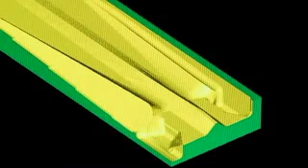Digital design in the context of building is the end of the process of 19th century industrialization. There's a lot of hype that has confused the issue to a certain extent. The ability to make wacky shapes, we've always had that ability. The real thrill is digital technologies make what we already made better, faster, cheaper.

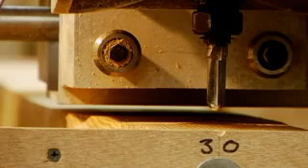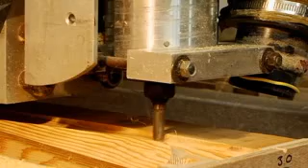Getting tools to run via digital information, first starting with paper tapes with holes in them, sort of like a piano roll, and then fairly quickly through computers. It's a very natural progression. Things like laser cutters, milling machines, routers. The basic platform for that machine, X, Y, Z axis, is identical to machines that were built and developed in the late 18th century. Those machines were not developed for people.

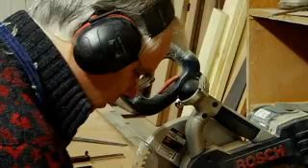A person can control two axes of movement, right? Like an Etch-a-Sketch. Pretty well. But the tool can go in any dimension it wants. Is this happy going in a straight line? Is this going in a curve? Is it going in a curve in 3 dimensions? And a robot, of course, can move all over the place. It has 5 or 6 axes of movement.

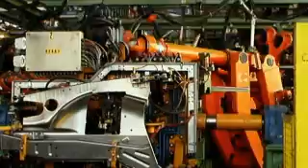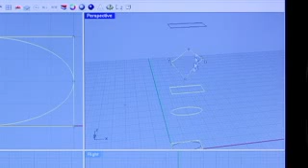For designers, the exciting thing was when that machine code, the G codes and M codes and so on that actually run the machine tools, were able to be combined with the programs that allow you to see what it is you're making. So the drawing and the machining came together into CAD/CAM programs. When you have a 3D model that can be rotated, you can take sections at any point, and they can actually be used to run machines, your ability to make complex shapes is obviously greatly eased. Now you can operate the tool over a fixed piece of work instead of putting your work through a fixed piece of machinery.

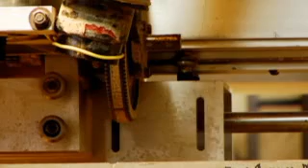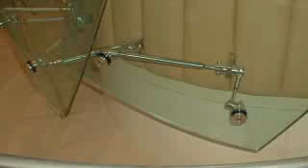The beginning of our involvement in buildings was Pei's pyramid at the Louvre. We came up with the fittings. Pei understood that as the structure becomes less and less, you go from this big steel beam to smaller and smaller tension rods, the level of detail in what's left becomes more and more important. The parts look simple, but they're becoming Swiss watches. Take the Condé Nast cafeteria where you have these organically shaped 16-foot long pieces of glass. The fittings that hold that glass up have multiple parts in them that are moving.

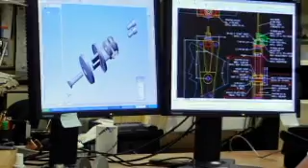People have been doing precision things for years. If you were making ball bearings in the 40s, a crude ball bearing that's 1/8 of an inch in diameter has a tolerance of maybe plus or minus 1/2 thousandth of an inch. That's a crude one. But it would take you a day to set up a machine to actually get the precision. You leap forward to today, we'll make a very sophisticated computer solid model, send it to the milling machine in our own shop, and make a physical model in a couple of hours. I can run 5 models a day.

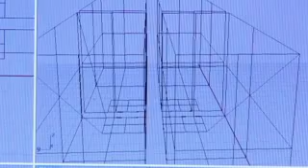To be able to test a piece digitally and then physically with a different tool offset or a different tolerance, that's terribly liberating. So if I'm designing a column and I need a dozen of them, I can spend a dozen columns worth of time on that one, and the rest are automatic. It doesn't make it any easier. I don't spend any less time overall, but my time is better spent, and I can make much more complex and satisfying things. Fundamentally, you're dealing with real materials and not virtual materials. You can't have the building fall down.

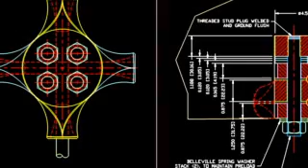So really one of the beauties of digital technology is that I can get closer to the casting vendor who's making one of these parts. Casting is literally a black art. It's just like in the times of Dickens, you got this great dark room and at the end is this orange glow. Now he has very complicated thermodynamic models that say, I need to increase the volume of this thing by 1% because it's going to shrink. So his piece of software increases the volume and then sends it to his milling machine. So from our standpoint, that's a fantastic thing. We know absolutely that he is analyzing the same form that we're analyzing. On a practical basis now, you can marry his technology with your desires.

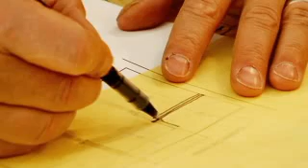We're still sort of in the first generation of students who go through school knowing these are possibilities. But I don't think that you'll see fundamental changes in the shapes of buildings much beyond what we've already experienced, simply because the construction industry is based on thousands of years of taking trees, metal, and even new materials and turning them into straight things, something that's easy to ship, easy to stack, easy to make stuff out of, easy to fit into tools. So the idea that we're going to replace that seems to me unlikely.

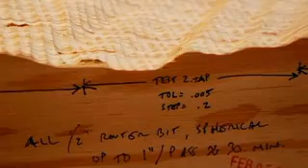But there's huge opportunities for craftsmen to get involved with these technologies and take it somewhere else. It's happening now with architectural components, woodworking shops, metalworking shops, taking the language for conventional building components, railing systems, lighting, columns and column capitals, somewhere new, to create a culture where we don't have to go to catalogs to order everything. Digital design fits within a kind of continuum that has become sort of fully developed and enriched in the last 15 years. It's not new anymore. And so when a thing isn't new and the heat is taken off, the craftspeople, the people who really care about it, who are really going to do not the first thing, but the best thing, they're moving in.